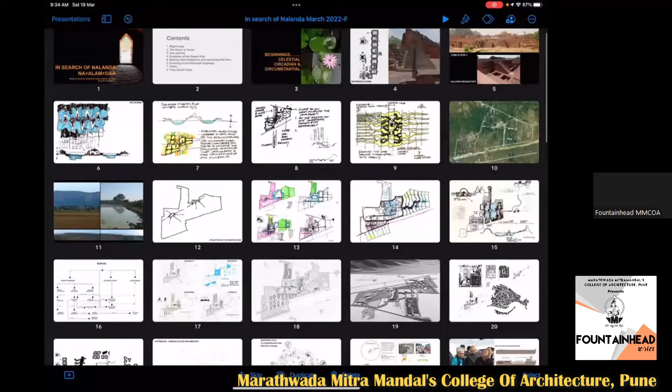I'll just share my screen, and then just tell me in case the screen is not being shared. Is my screen visible to you? Yes, sir, your screen is visible. Okay, and you can hear me clearly? Yes, sir, you are audible clearly. All right, thank you.

The word Nalanda is actually three words in Sanskrit: Na Alam Da, meaning no stopping the gift of knowledge. So it's the spring of knowledge, as they call it.

Nalanda is a renowned Buddhist monastic university in ancient Magadha, modern-day Bihar, considered by historians to be the world's very first residential university and among the greatest centers of learning in the ancient world. It was located near the city of Rajgriha, now Rajgir, about 90 kilometers southeast of Patliputra, now Patna. Operating from 427 to 1197 CE, Nalanda was established during the Gupta Empire era and was supported by numerous Indian and Javanese patrons, both Buddhist and non-Buddhist. Over some 750 years, its faculty included some of the most revered scholars of Mahayana Buddhism. Nalanda Mahavihar taught six major Buddhist schools and philosophies such as Yogacara and Sarvastivada, as well as subjects such as grammar, medicine, logic, and mathematics.

Now I'll share how I'm going to go about this presentation. First is the beginnings, because I think in all of us there are deep hauntings that we reveal as we work, and I'd like to share that part. The second part, a continuation of those hauntings, is what I call the power of ruins. Then the journey of how we discovered Nalanda again, followed by the evolution of the master plan, and then making good neighbors and achieving net zero—it's a net zero campus, one of the largest in the world. Then evolving an architectural language, with some views I'll share; it's still under construction, not completed, but it'll give you a fairly good idea of where we are. And I'll end with the idea of what truly smart cities are, or what I consider as truly smart cities.

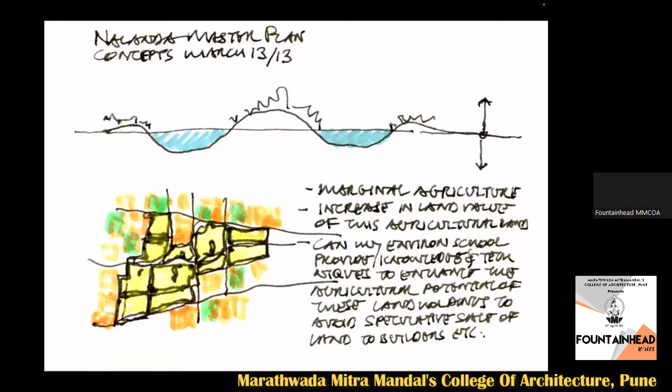We started wondering, can the environmental school, which was going to be one of the schools part of the program, provide knowledge and techniques to enhance the agricultural potential of these land holdings, to avoid speculative sale of land to builders? Because the moment you build out here, and announce that a university is coming, all the land values around it would start shooting up. Savvy builders would come and start buying land, making towers that would overlook the university grounds.

The other part was, how do you locate something on the land? 455 acres is very large. Do you keep the connections that cut across your land? Do you have a bulk of your land for agriculture? How are you going to demarcate this thing? And how does the water come from the Rajgir hills in the background, and slope towards the Ganga in the far distance?

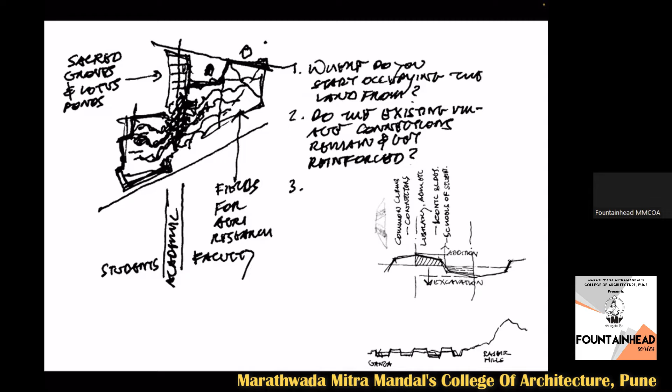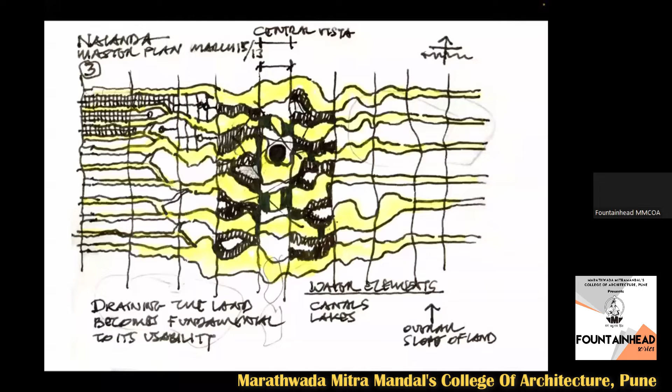These kinds of drawings and sketches started happening, where you can see, 2 days after that first sketch, there is this talking about veins that will feed up water bodies, connect together and drain the land. As we discovered while doing these sketches, there was a team doing research that found a system called the Ahar and Pyne scheme, traditional in Bihar, where they make channels and holding ponds connected together to irrigate the fields. This sketch was, without knowing about it, very much in similar veins to what we discovered.

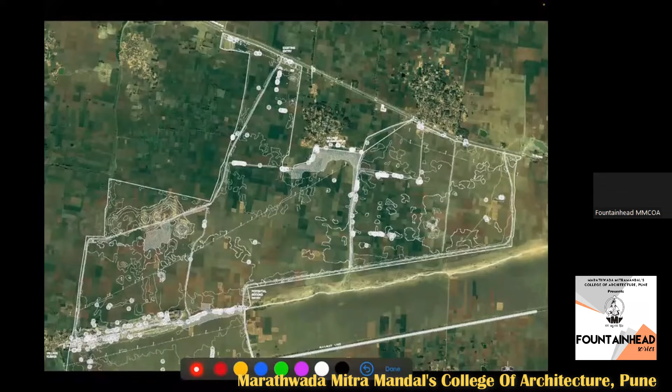So the land, if you really see it—this is a satellite image supplied to us. You will start seeing out here that there is a village here, a village here, a village here, a village here, and a village here. Our boundary sort of touched upon some of these, cut in, made this, and went around like that. On the other far side there was a railway embankment out here, which is here. And this is how the boundary went.

If you study the land carefully, this was the national highway where our main entry would be from here. In the future there was another road proposed here, but whether that would happen or not, we didn't know. So this is the kind of information we had. Then, very significantly, we discovered there was some kind of water that used to collect—this is clay soil, so that water would collect and remain here for most of the year, not drying up. So this was another clue that we looked at.

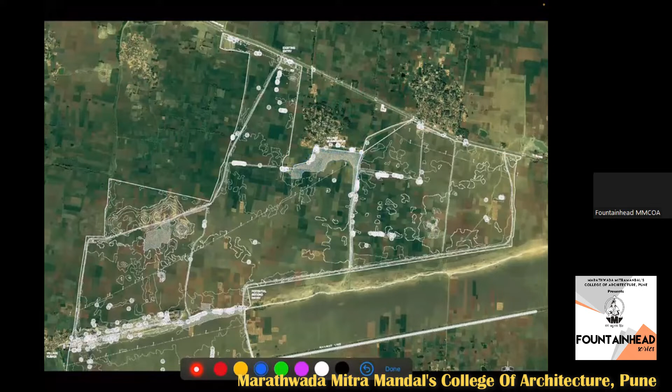Now, the Rajgir Hills are very famous. It's a place of pilgrimage. The Buddha came and meditated out here. Mahavir came out here and meditated. So for both Jains and Buddhists, it's a very sacred place. Even for the Sikhs, one of the gurus came here and meditated.

So therefore, this land is sacred land. These hills are sacred. And so the question was, when you build something here, would you remember that there is a sacredness to the place, that this is hallowed ground?

So what I was talking about earlier was about this tension between the two, to somehow connect these two water bodies, the land and the water. And being a net zero campus, we had to have our own sources of water without digging into the ground, no bore wells, only surface runoffs from the rain.

We had to manage all our waste on site, and we had to also take care of all our energy needs on campus. So all these were part of the net zero challenge that was thrown at us.

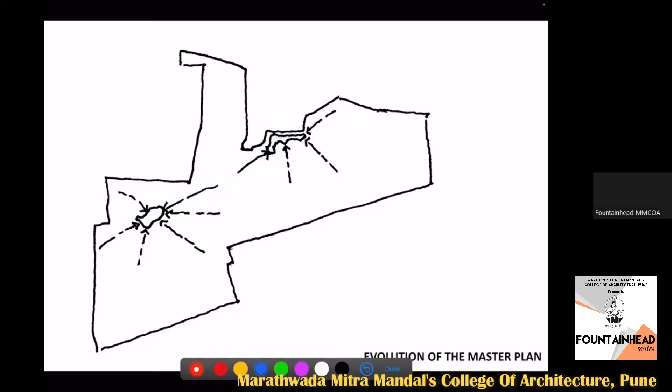So this is how the plan evolved. Now it shows you sketches. It shows you how you start trying to connect those water bodies, and then the water bodies take on more definitive shapes, and then the zoning of various things that happen around it, what surrounds it.

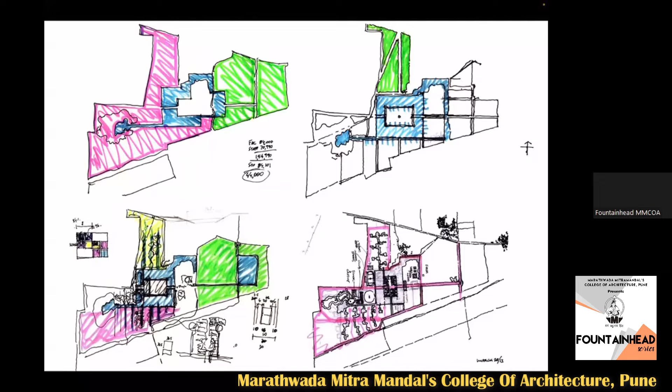And so now you can see in this one, there is a central pond that connects the water bodies here and here which exist. And then there are channels that flow from here, connect into this.

There are channels that will flow in here and connect through a series of ahar and pyne drains and smaller retention ponds, etc., which flow from here. There are ones that slope down towards this side and collect water.

So we were looking at all this of how, though it's supposed to be considered flat land, there are very gentle slopes, and how could we work with even that little bit of slope that was there.

And also remember that sometimes it floods out here. There are heavy rains, and the whole place floods. So we needed to make sure that the campus, once designed, could be entirely safeguarded from flooding.

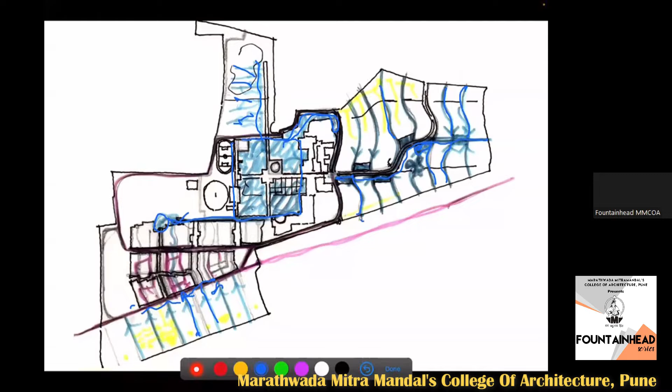So finally, what we came to was this sketch. And this sketch was about, as I said, like those ancient temple towns. There are tanks which are interconnected together.

The various shared facilities happen in between, here and here. And then faculty and staff housing happens on the other side here. And the student housing happens on another side. And they connect up to these and share these. And the center becomes the library, the fulcrum of the whole thing.

And we also started looking at fluctuating levels. You collect water, but there will be evaporation losses. You will consume the water also. So levels would rise and change over the year, over the seasons.

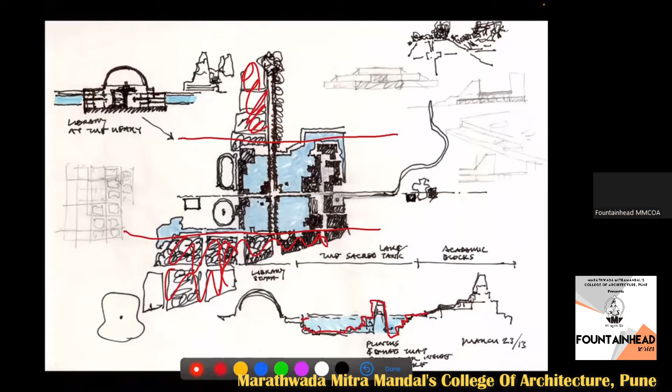So therefore, we wanted to make this tank in such a way that certain things emerge out of it, that it gets flooded and then it emerges. So that's another story, that there is a past which perhaps is not there. There are no remains or ruins on this land. However, they may emerge and seem apparent as if they had emerged from the ground.

Now we all know that rainfall is not about just collecting the rain, but the runoff it generates from the roofs is different from the area where it falls on the ground, and on the landscape it is different. And then some will go into the soil and some will be lost to evaporation.

So we decided very early on that all the roof runoff, much like our ancient towns, would be collected in underground water tanks, and that would require the least amount of energy to filter it to supply drinking water.

The paved runoff, because there would be more impurities on the paved areas on the ground, would require more energy to be made fit for drinking water, but it could be used for other things. So for irrigation, for cleaning various areas, for washing, etc., we could filter this at a lesser energy cost, and that could be used.

And the landscape area would be recharging, of course, into the aquifers. So with this, we started working out our strategy of water balance, as we call it.

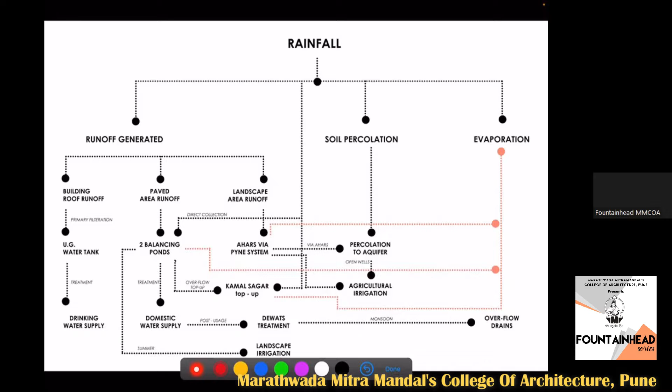The other aspect was how far can you walk comfortably in this kind of weather. It's a hot, humid climate, but you need heavy thermal mass during summers because it gets extremely hot, and you need breeze to blow through. So you need perforation at certain levels. There's a combination you have to work with. It's not hot, humid in the traditional sense where you have very light structures.

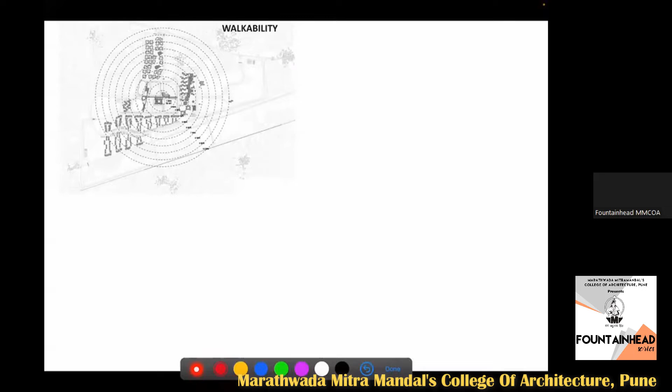So for walkability, we decided that from the heart of the campus to the edge of the campus should be a 10-minute walk along landscape areas. Considering about 80 meters a minute for an average person walking comfortably, we used that as a basis to decide the distance we'd like to traverse, and the whole campus should fit within that, with all its phases.

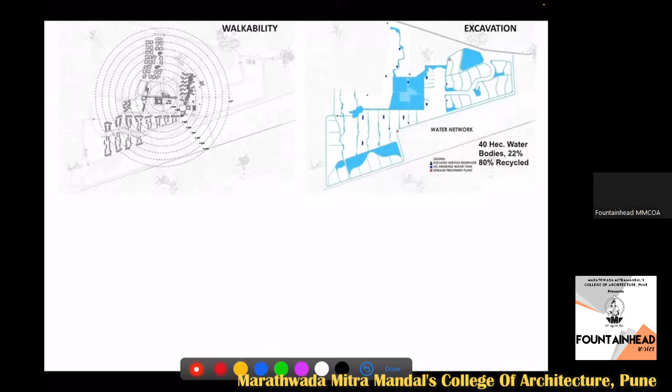The other layer was the excavations needed for water. We have almost 40 hectares of water bodies, about 22% of the land. Beyond the water bodies, you also have elevated service reservoirs, underground drinking water tanks for storage, and sewage treatment plants. Almost 80% of sewage is recycled, and that water is used for farming and irrigation.

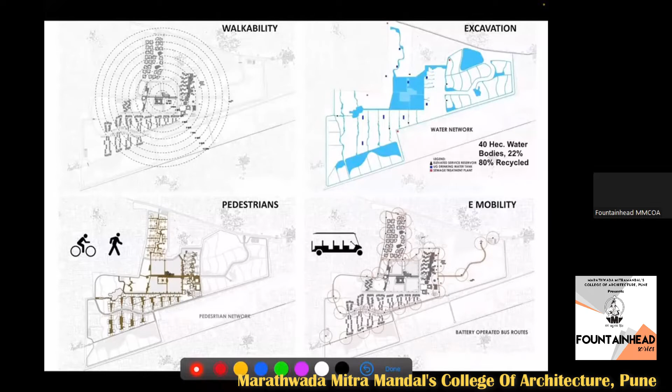Along the water and buildings, you have courts and connections, and pedestrian networks start emerging from that. We also need access for service vehicles and emergency vehicles, but on a daily basis we need e-mobility as well. There are golf cart-like battery buses that pick you up from the parking lots at the periphery gates and take you inside, with bus stops all over so people can hop on and off if they don't feel like walking, or if they're aged or too young. That's something introduced into the plan.

So these are the various layers that make up this plan. You can see the water body in the center here, and then several other large water bodies, which are the retention ponds. We collect all our water into these as well, and it's then pumped from here, from all these retention ponds.

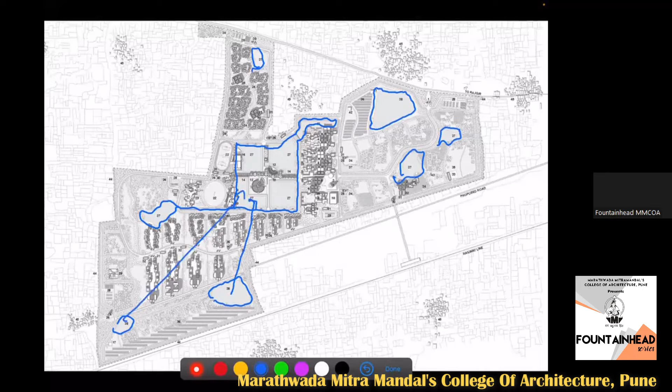The levels in these ponds can vary, but the central one always remains full. As we developed this plan, the idea became that we should always keep the central one full, and that's where we use it. The central one is visible to all, so if you pollute it, you're polluting your own water - that became a very important strategy. All of these feed into the other retention ponds in the periphery.

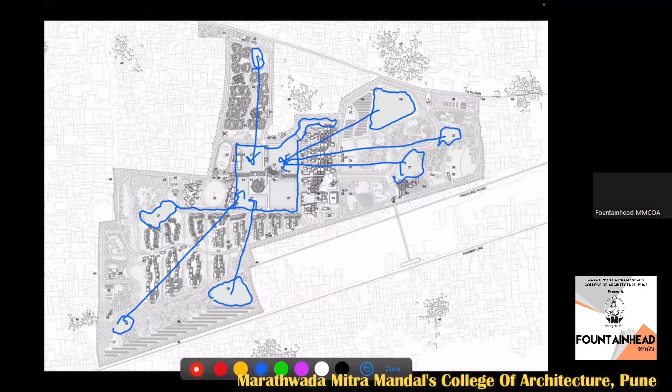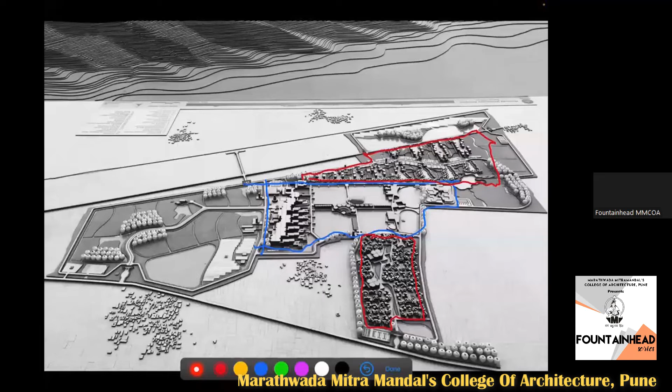We've been trying to achieve a density that you'd get in a city, yet still have open spaces for badminton courts, volleyball courts, informal interaction areas, etc., along with terraces that look into it. So it's a very high density program in a limited space, yet still functional within the climatic boundaries we're working with.

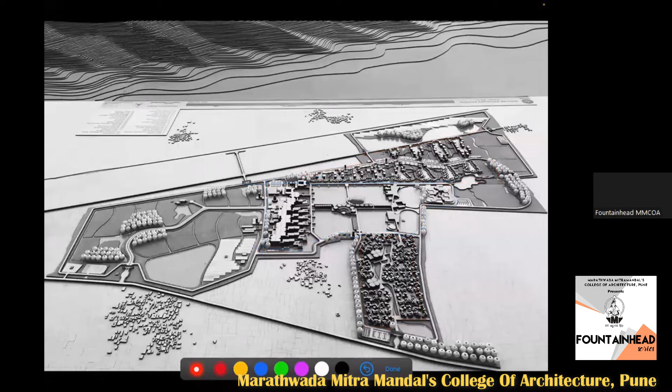Now, if you compare the plan, it's almost as large as Venice in terms of length and width. However, the density is far, far less. If you compare this to Sarkhej Roza, number 5 here, you see the tank is about one third the size - our tanks are about 3 times larger than Sarkhej Roza.

Then this is Jaipur, showing the palace complex and actually 4 quadrants of Jaipur. Number 2 is the Forbidden City in Beijing as a comparison, and 3 is Srirangam. The 4th shows Fatehpur Sikri and its size compared to what we are building here. This is just to give you a sense of scale.

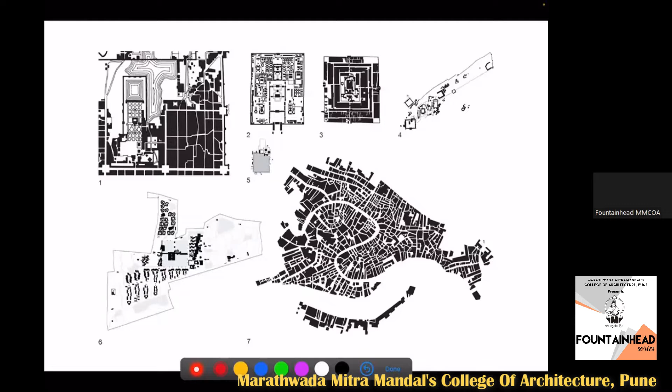How do you get a sense of measure of things? The ruins excavated at Nalanda are about 500 meters from the furthest temple to the last cloister next to the stupa of Sariputra. This is the distance our academic spine with all its schools stretches out, and also the distance from the hostels to the library, and from one end of the hostels to the other.

The schools, the various components of the university, are laid out along this spine, like cutting a slice of a cake. However, along this spine, all the classrooms are shared. The faculty rooms and laboratories are exclusive, but the classrooms are shared, making a continuous space so that all the schools talk to each other.

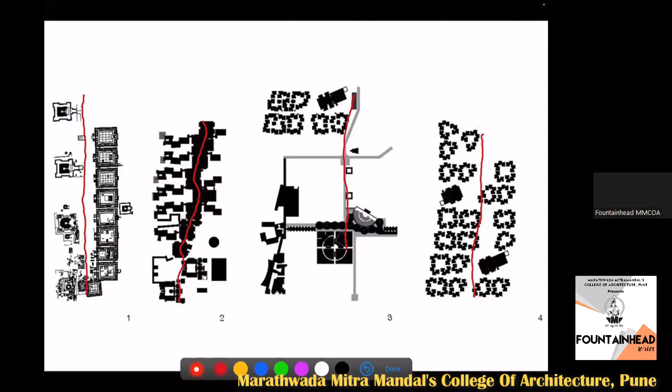Another very important aspect was making good neighbors. We had read in the literature available that 200 villages used to contribute the provisions required for the 3,000 monks and students, and that the Jagir used to supply provisions for all these monks and their sustenance. This is what the king had decided during the Gupta period.

We decided this should be reversed, because today there are marginal farmers. How do you make a handshake with the villagers in the surrounding area? This became a major theme of the way we designed the university.

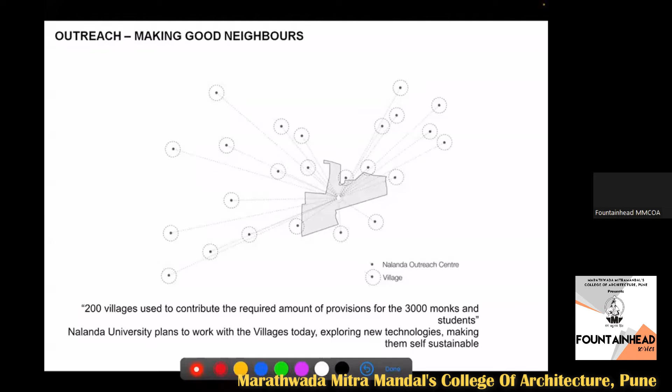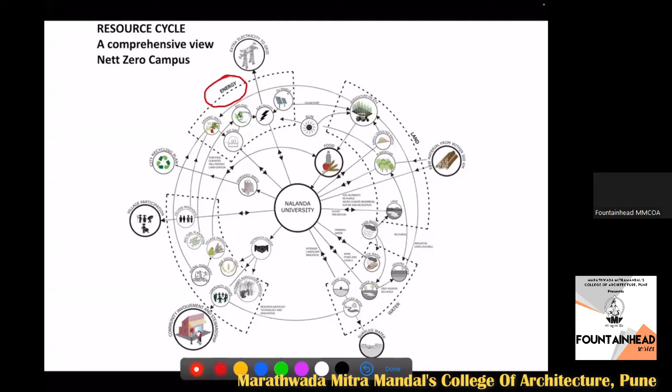When we looked at the resource cycle, it became clear to us that managing energy would become a classic handshake, since they have organic waste which we can use to generate electricity, a resource we would borrow from them. Besides buying food, we'd give them advance money for agriculture so they'd be assured of our supply and able to sell it. All this became very important in the design of the university.

We did a study and found that in a 4-kilometer radius around the university, there are about 1,000 people per square kilometer, generating about 230 kilograms of waste per square kilometer. There are about 100 buffaloes, 200 cows, 100 goats, 50 chickens, and 10 pigs per square kilometer in the region.

If you look at the waste generated, you could use all of it, including biomass from agriculture crops and residues seasonally, sewage collected from the city of Rajgir just 3 kilometers away, municipal solid waste, animal residues, industrial residues, and forestry crops and residues. This biomass can generate gas for use in an external combustion engine, which requires very low calorific fuel, so any gas, even gobar gas, would work.

This process would also generate heat, which would be used to dehumidify our air and the water used for cooling in air conditioning. This evaporative cooling would be the first stage, followed by normal air conditioning, so your energy usage for air conditioning would go down. This would be mixed with photovoltaics as well.

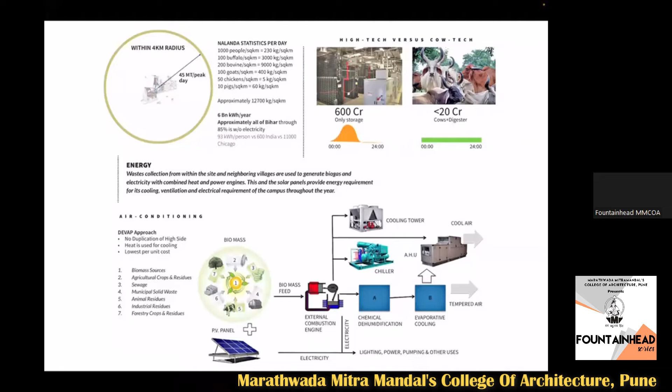But in this region, the number of sun days is much less, with more cloud cover, especially in winter. So you'd need power not only for the night but also during the daytime when skies are overcast. Keeping that in mind, using cow tech instead of high tech became our mantra.

The other aspect we looked at was land and water, as I mentioned earlier. We did a quick calculation initially, and this has been authenticated to a large extent - that for construction, if we could use the same soil we were excavating to collect the water needed for annual usage, that soil could be made into compressed earth block. So instead of fired bricks, we'd use compressed earth block, and the soil from these excavations would be used for that.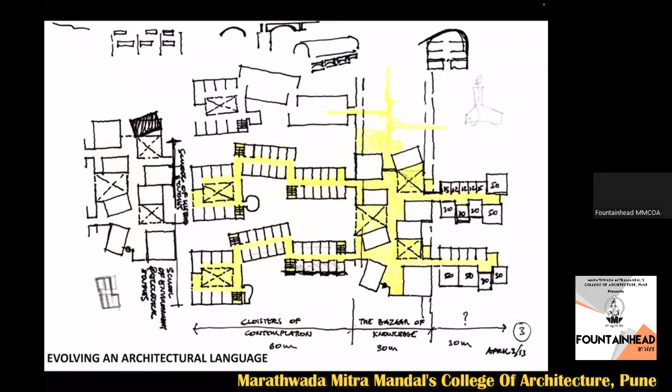There were courtyards formed between them, and we wanted them to look into gardens, into these courtyards. So they were not in one straight line, but connecting through and through into various parts. There were some which were single story, some two stories, and some three stories - they started climbing up, and I'll come to the section on why that was so.

Then there were common classrooms in between, and attached laboratories as you can see here, which we called - going from the Cloisters of Contemplation to the Bazaar of Knowledge, and finally to the Incubators of Innovation, which are the laboratories.

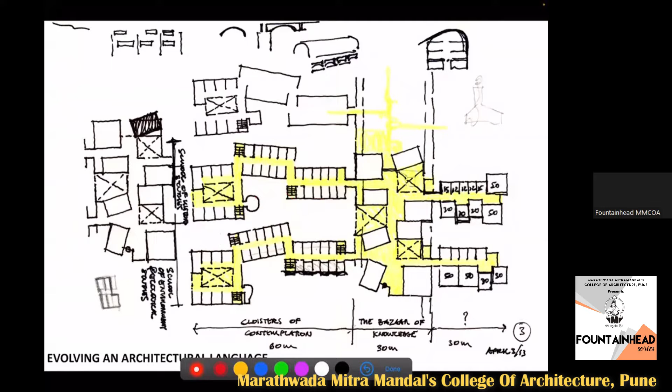This was the landscape that would flow - from the central lake, water would be drained into these parts and the edge would be a public space. So these cloisters I'm talking about were one floor, two floor, three floor. These were almost four floors here because they had higher heights, and then the laboratories would step back - so it was a stepped section that worked right through.

The landscape would be penetrating not only into this courtyard, but actually going in and flowing in. The idea was could we use this landscape to penetrate into the building, so that the whole idea of building and landscape, inside and outside, is combined.

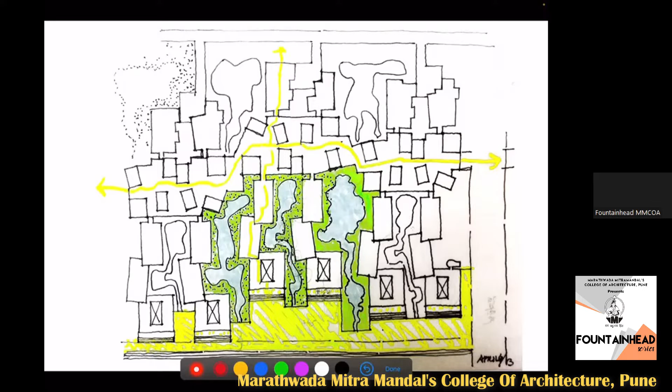The other aspect was that every time we visited after winning the competition and looked at the ruins - it has always been a place of pilgrimage - you see serrated edges of brick left there from excavation. I don't think they were originally straighter walls, but after excavation, this is what was left of the ruin. Even when there are straight walls, the top portion has been serrated like that. We said, could we use something like that as the basis for the design?

So we got a truckload of soil from the site, before the contractors came on board, into Ahmedabad. There we worked with a specialist on compressed earth block to check the efficacy of using this soil, changing the color because it was very gray, whether we could add some soot to it, what percentage of soil and cement, and then test for strength, water absorption, and long-term stability over many monsoons. This is what we did with that soil.

While this was going on, we were also thinking about this kit of parts I mentioned. We looked at making the periphery walls as service walls, where all our AHUs, staircases, toilets, etc., which do not require air conditioning, are placed. So like the ruins, you have these thick walls, very thick walls.

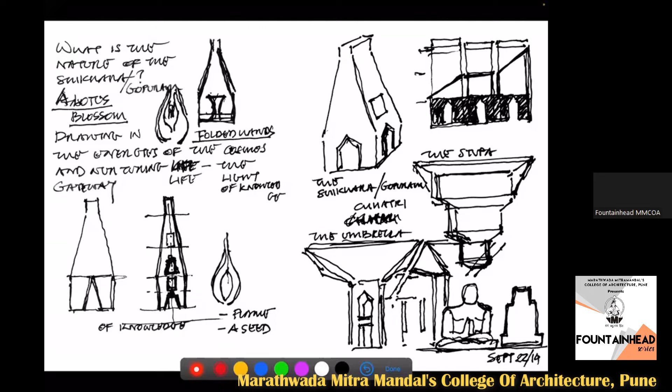Inside the spaces, because of the shade and if there was a covering roof, it would be like a veranda - a cooler place. So cooling those spaces would take less energy, and we came out with the periphery. There would be roofs much like an umbrella to collect water, with larger classrooms above and smaller meeting rooms at the lower level, so they would have more privacy and more acoustical privacy.

And then the stupa, we thought of it as what is the nature? It is almost like the Buddha is in meditation. And that is how the stupa originally originated, as we found out. It is almost like radiating energy in the center.

So with this combination, from protection from the sun, the water, to gather people, to protect from the sun, to collect water, and to gather people, the shikhara, or the gopurams, as we eventually called them, all of these sort of evolved. And you can see these sketches as they happen.

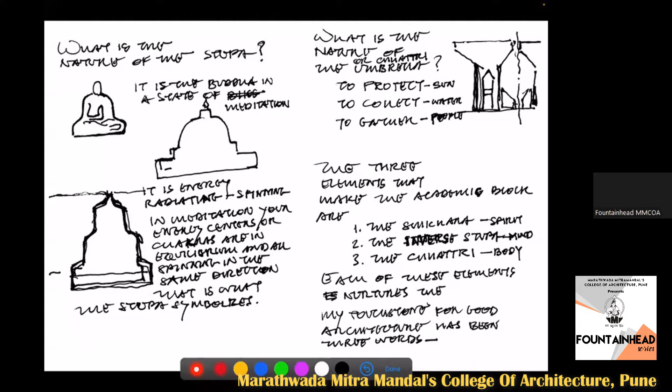Even in the parts where there were slightly different forms, we had double walls. So the peripheral wall is a thick double wall with landscape in between, and it gets limited openings, and it gets light from both sides. It gets light from the sky, which reflects down and comes in. So it is muted light because, as you know, our light is very harsh, and you need surface to make it cool. And this area in between then becomes the barrier to cool this down. So you can have almost glass out here, and this becomes heavy with limited openings in it.

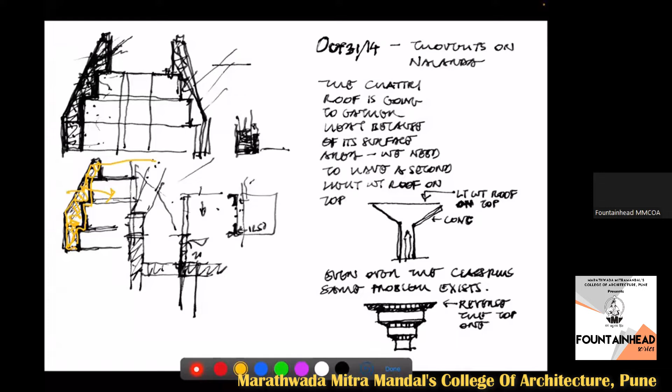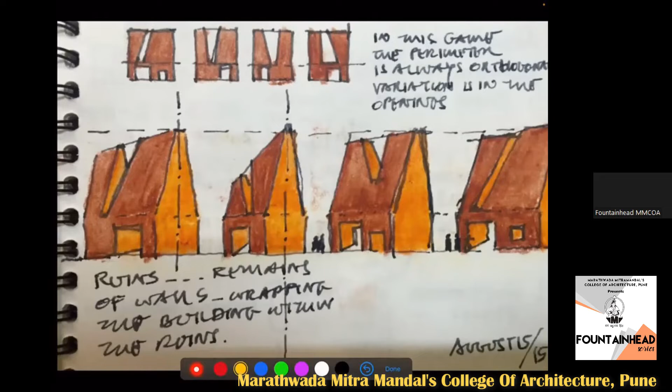So this is the form and shape that started coming out of a standard module, but the top part of it after 5.4 meters would change for openings depending on what you were looking at, which direction you were facing, etc. And so this became a game to be played out depending on the circumstances.

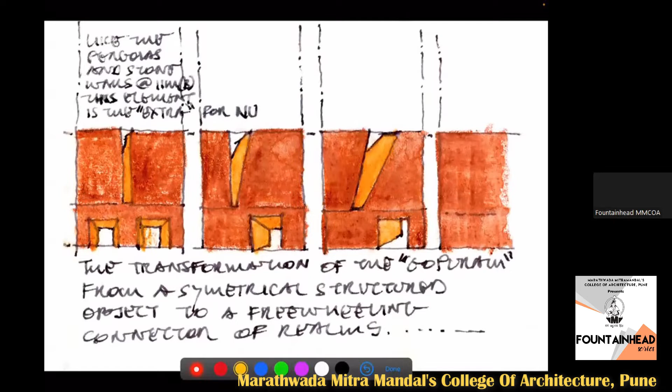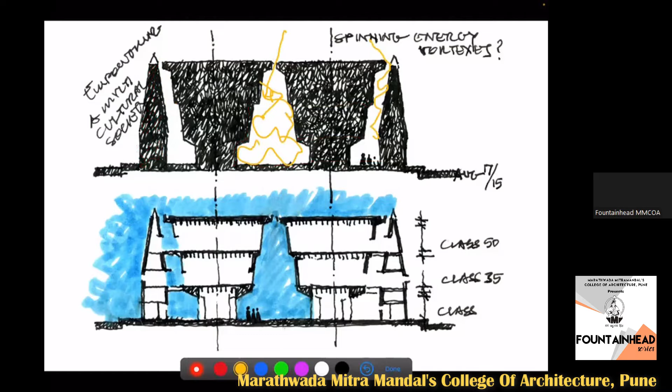And you could control the light because you had limited light coming in from the top out here, which would bounce off, and this whole surface would get limited light coming into it, rather than large amounts of light which cannot be controlled, or cool light as I call it.

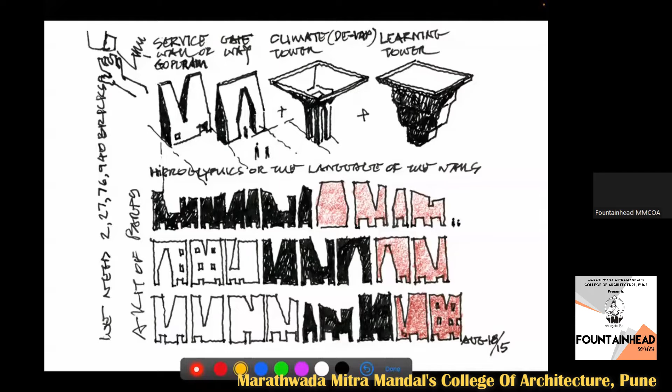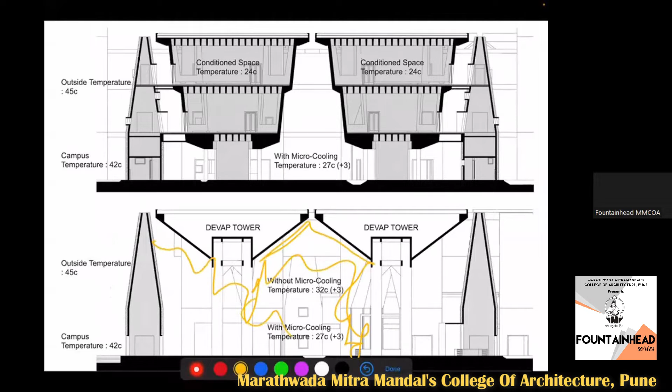So if the outside temperature is 45 degrees on campus, we would expect it to be, at least because of the landscaping etc., 2 to 3 degrees cooler. And the inside space in the shaded areas, this thing would be in the region of about 32 to 35 degrees because of the shade and the breeze blowing through it, through these openings. And so therefore, we would have to go from this 32 or 35 degrees to 24, which means that you're not going from 45 to 24, which is almost 21 degrees difference. You've reduced it to about 8 or 10 degrees.

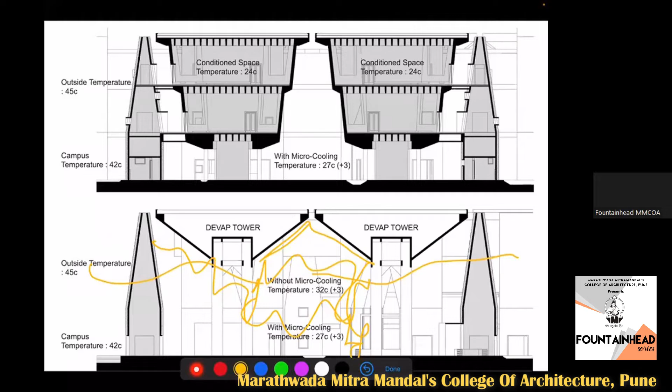So this is what I'd sort of emphasized to you earlier. It shows you the stupa that is being formed in inverse.

Now, as I mentioned to you, if you look at our old ruins, you find that the light hits these sides, and this large surfaces with limited openings in it allows this place to glow the way it glows out here. And so therefore, this is the shape and form that somehow started making a lot more sense in here.

Except that our sources of light were, with the kind of technology we are using today as against those, you didn't need the arches, and those light came in from this and bounced off and came down.

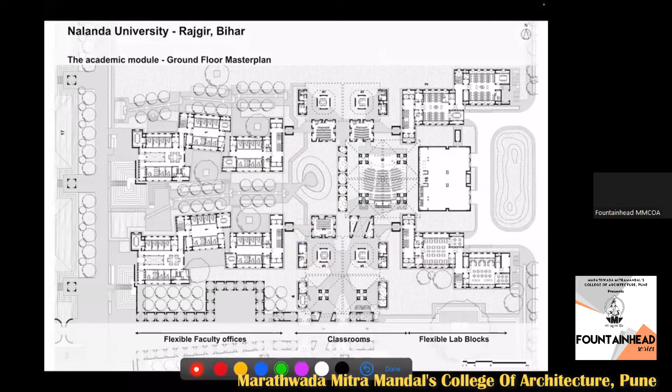So you have a series of isolated looking fragments, but together they make something larger, something much more collectively larger. So this was the idea of this kind of building network that has been produced, and therefore you can also build incrementally if you so decide.

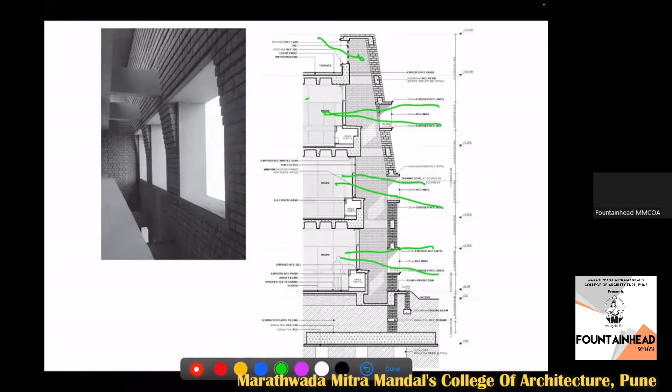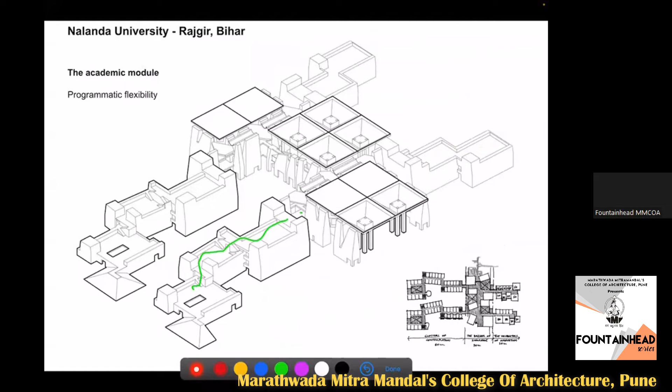Now here is a comparison, at the same scale, this was a poster done in 2016, but it shows you how the various cloisters of the excavations and the scales of spaces within the new buildings compare. This is just the first space that we put out here, showing a comparison of these different scales that are there.

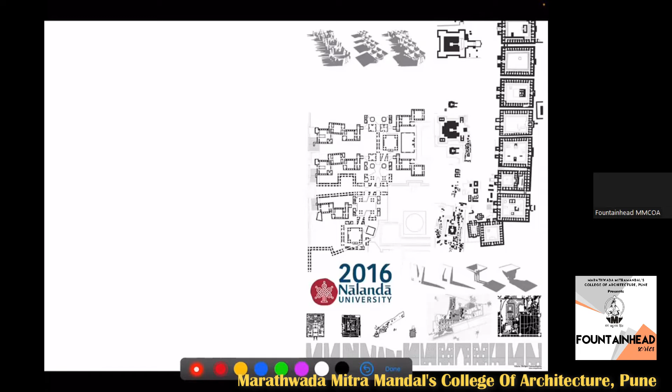And this then translated into this kind of three-dimensional form. So this is a model showing you from the water body at this edge of the lakes that were being formed, and then the stepping up terraces climbing up to this path.

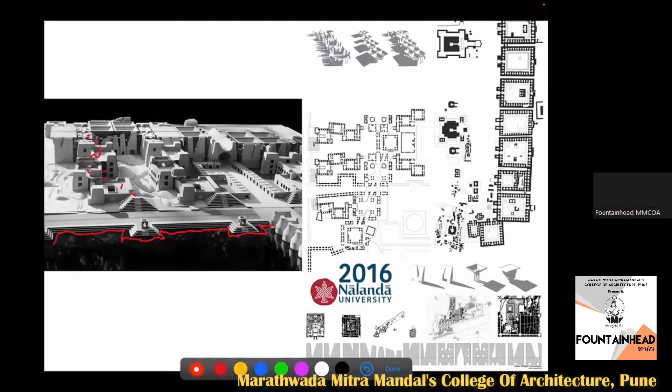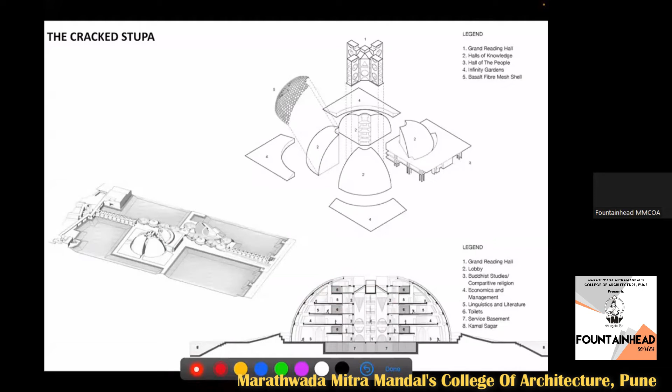Now, while we were doing this, we got the bricks made. We only got 19 tons of the sample made, to see how it would react during earthquakes.

It was very successful, but it also showed that nobody had ever used compressed earth block to the quantum that we are using here.

So it was important to demonstrate this where the new contractor had just come on board, to show them it was possible, because in government contracts they would often say this is not possible, we have not quoted for this, we will charge extra, etc. So this was done to demonstrate to them.

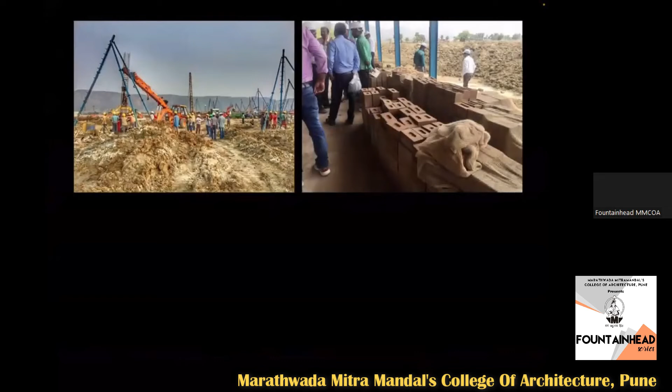Then piling started. This is clay soil, so we had to have 12.5-meter deep piles. We had to start making blocks.

The factory for that was to be set up as part of the tender. Water excavation tanks were the first things excavated, and from the first monsoon onwards we used that water for all our construction, so there was a good source of water.

Then the samples of burnt brick and earth block were put together, to see what the effects would be on each of these. So, as in any job, you get samples and mock-ups done, and this started happening.

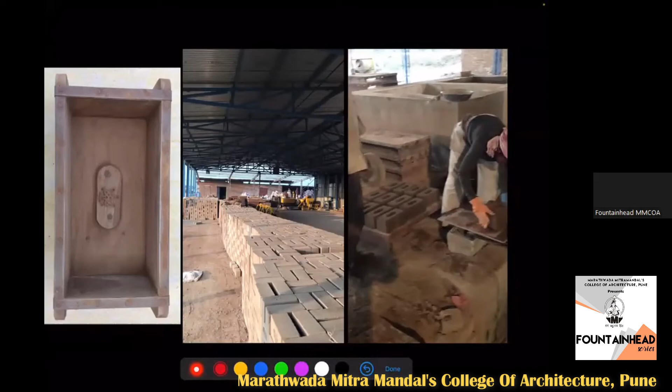We designed this using a brick from the old ruins in Nalanda, which I took from the ASI. They were invited to bring them after we won the competition. I said each brick, after 1200 years or whenever this is finished and only ruins are left, should have the stamp of Nalanda University. So this was the logo of Nalanda University put into these molds.

You can see how the bricks were made, all automated because of the large quantities, and both the main contractors have been making this brick on site.

There was a shortage of burnt brick in between because that had not been planned, so more earth block was used in certain parts. There was also a shortage because the curing of the earth block had not happened, so burnt brick was used instead. It's a mix of these, taking circumstantial situations into hand and playing with that. There is no clear definition of one or the other.

If you go to the old ruins, you'll find similar situations, though they haven't used compressed earth block, different sizes of blocks have been used. You'd be amazed at the variety of joints and bricks in the actual old ruins. So we let these kinds of situations take care of themselves by mixing things up, and I think that is the strength of when you mix things up.

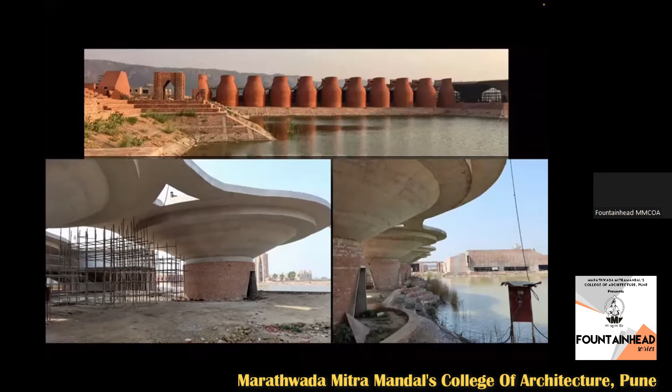And then those amphitheaters for informal classrooms, etc.—you can see some of that also. And also the shopping areas and student facilities within these shells, as you walk through as a covered bazaar. So that gives you an idea from the amphitheater, the connections to the main academic blocks, and then some of those spaces in the market areas as you walk through them.

Now the hostels were also a takeoff on the Nalanda cloister. Instead of a straightforward courtyard of just one type of room and facilities, we decided to make a cluster of student hostels, which were like little apartments, but together they form a large court.

And in that court, very much like in the old things where there are granaries, kitchens, and other things added in the court, we added meeting spaces within. So the typical cluster is the same form, but it has three different variations. One is where there are two-seater rooms shared with common toilets. Then there are individual rooms with attached bathrooms, and then there are apartments for married students which have two rooms—a living study space and a separate bedroom with a kitchenette and a toilet.

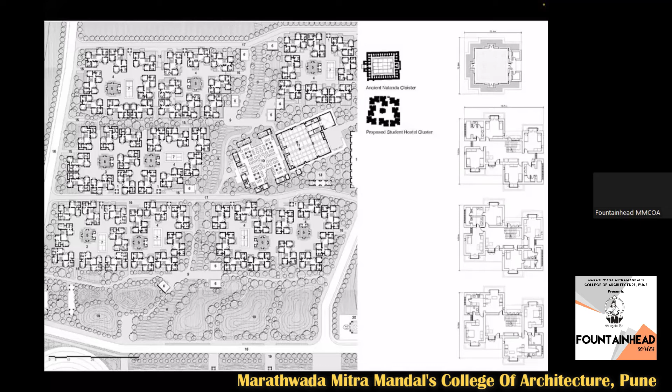But they all from the outside look the same. The shared spaces in between are also the same, and they form different clusters around this place.

And then they are made mostly up to the first level, up to the plinth, of burnt brick, and then after that there's CSEB, and they're all load-bearing structures. So the strength of this block is quite good—it is as good as the burnt brick. And then they have their little alcoves and balconies that stick out where there are study tables for the students to use. And then the terraces sort of also climb up and down in this because there are different heights, as you can see.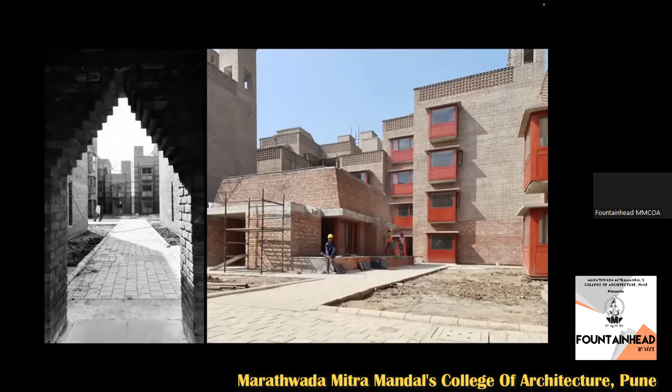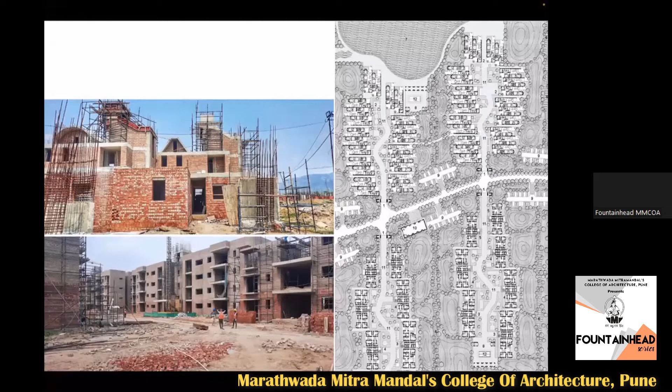Similarly, for the faculty houses, there are two types. There are the bungalow types, which again have slight variations in the roof, and they're essentially like tubes which allow the east-west breeze through, and they have two floors. And then we have apartments, which are all 4 floors, and they have large different typologies—there are 4 different types of apartments, from very large to smaller ones, depending on the hierarchy.

So this is a view of where it is now, where things are getting completed across the lakes.

The landscaping and finishing of various things is going on. It still needs to be completed. Some of the buildings have been occupied and others are still to be occupied.

Last year I was invited by the Royal Academy of Arts, by an exhibition curated by David Adjaye, to submit some artwork for this exhibition in London. I submitted these two scrolls, as I call them, which are about Nalanda. So it was about geography and architecture.

It showed the present context, the excavations we have done, the material that has been obtained, and the collection of water that goes hand in hand with this excavation, which allows the campus to be formed. And that becomes the place of learning of life, and all of it combined together makes habitation. So these posters were exhibited out there.

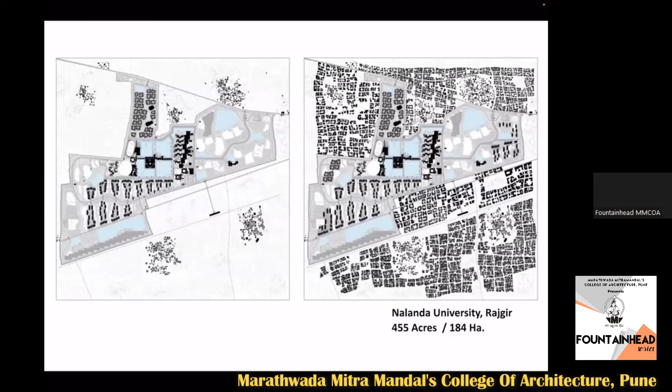And lastly, I come to what I call the pebble in the pond effect, or smart cities. There's a lot of talk about smart cities. I think one of the greatest opportunities we have is that most of these campuses we've been working on through various competitions, whether IIMs or IITs, the moment they are formed, they will become the fulcrum of change.

All this will keep getting added on. The villages will change and transform, and cities will happen. So think of them as linking up in some ways to these campuses. These common spaces will become wonderful places or repositories for the gardens and parks of the town growing around them. If you start planning like that, planning the areas around that, it would make a huge difference in the way our cities would be.

You would have truly smart people, smart facilities that could be shared with the community, because the government is in any case investing so much money in doing a campus. The question is whether we should also capitalize on what will happen in the surroundings and plan for it properly from the day you announce a campus. One must plan for it properly. Even though this will be all private land, I think the planning can be done.

And therefore, by land pooling, etc., we have already made a proposal to the government of Bihar. Twice they've sort of tried to move on it, and then COVID came in between. However, this is something that is likely to happen.

So we look at it that when you do a campus, it's not only about the campus you're focusing on, but whether it's going to be part of a larger system of the city. Therefore, the densities, you're taking stewardship of the land and public spaces that a city of this nature, as it grows, would need.

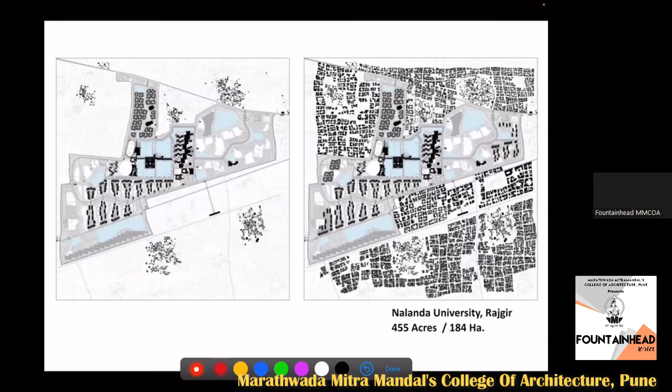So with that, I thank you for your time. I would be happy to answer any questions that you may have.